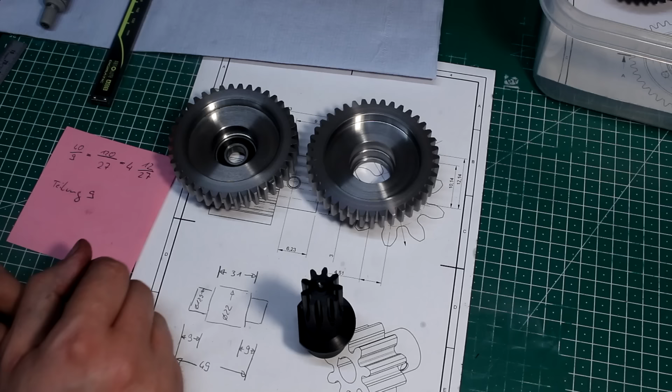Today I work on some gears. I have to modify some gears - these are already modified, and I have to cut two new gears. So we start by modifying these two gears. The gears themselves were commercially bought, readily hobbed gears, but they had to be modified. They had to be bored out, and later we will drill a bolt hole circle. And we need to cut this gear from scratch out of 42CrMo4, a pre-heat treated steel.

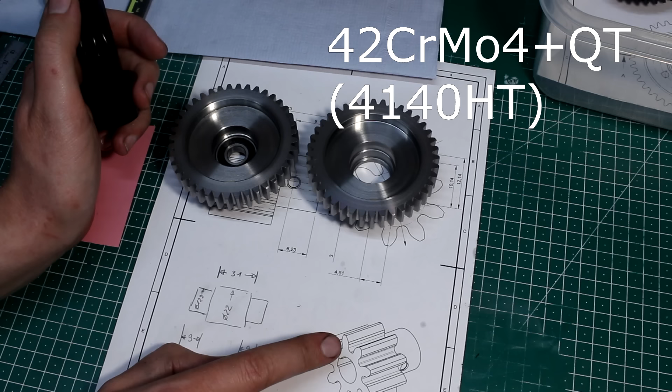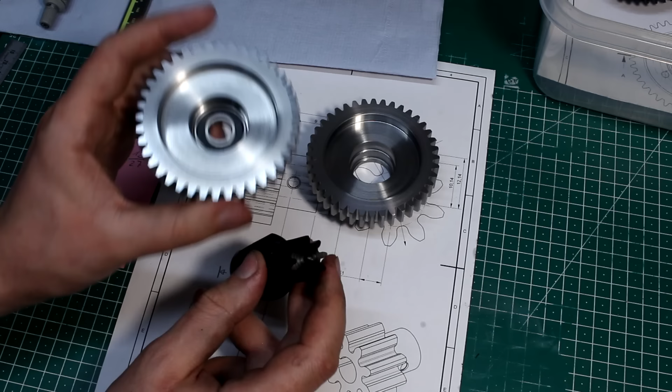4140 HT in the ANSI world. I already did a test part in Delrin because that's the most material I had at hand, and I just wanted to see if there is a minimum number of teeth that a gear can have. 9 is definitely very, very close to that number. The gear cutter I used is a number 1 cutter - I'll talk about that later - and that usually does only a 12 or 13 tooth gear, not 9. But this is for a prototype and has to be good enough.

So it seems to mesh - it meshes nicely. It rolls off the other gear nicely. The profile will not be ideal.

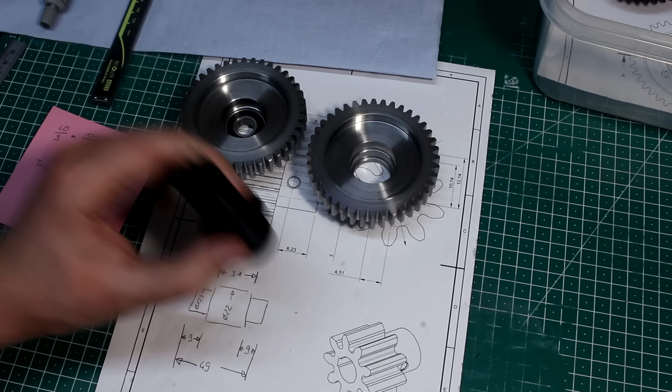So let's start at the beginning. First we look at these gears in an unmachined state - modifying a commercially bought gear. These are soft steel gears, hobbed gears from a supplier. And it's always a good idea with externally sourced gears to check if the pitch circle diameter runs true to the feature that you're about to machine.

In this case, I want to use the center bore as a reference for indicating on the lathe. So I put a 12mm dowel pin in here - that's a very close fit, almost a press fit. Rested it on two V-blocks, and I take a 4mm dowel pin which hits on the flanks of the gear teeth, and I'm using an indicator in my height gauge to check the runout.

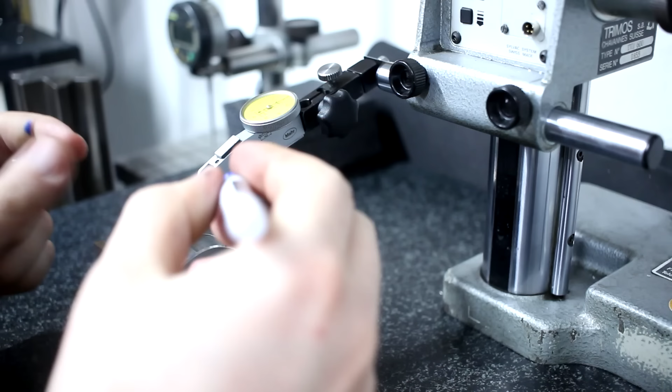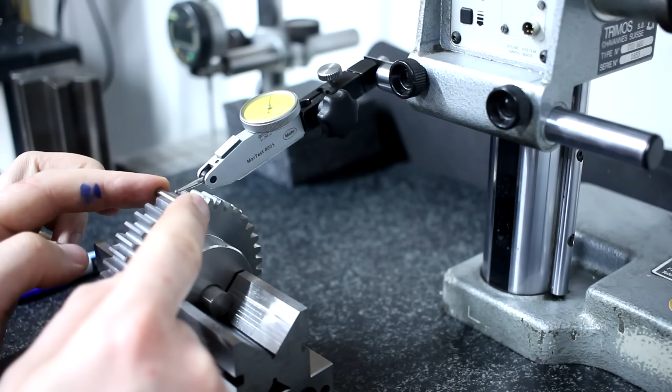I zeroed the indicator out on top dead center of the pin in one position, like this, and I mark the spot as 0. And I spin it about - let's go for 90 degrees. Go 90 degrees, reseat the pin, and do the same thing again. And this is also 0 - so far it looks quite promising.

I had cases where on commercially sourced gears, the pitch circle diameter was not running true to the bore. In those cases, you have to be very careful and indicate or hold the gear on the pitch circle diameter.

Okay, this is minus 10, meaning 10 microns. And last one, this is minus 15. So we have a total indicator reading of 15 microns, 0 to minus 15. That gives us an overall eccentricity of about 7 microns, and that's pretty decent for the application this gear is going on - that's way good enough. Here we can see the pin hitting on the flanks of the gear, on the space between the gear teeth, and the indicator tip riding over the pin.

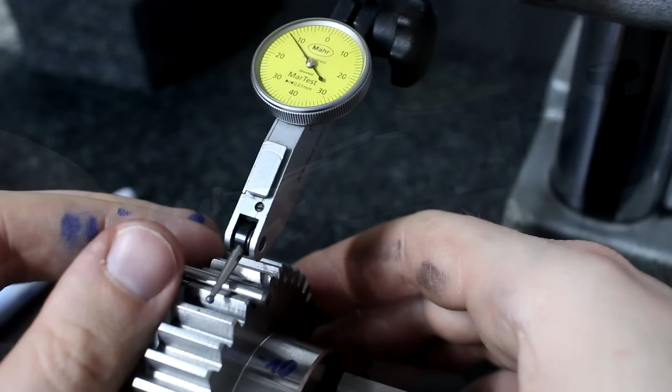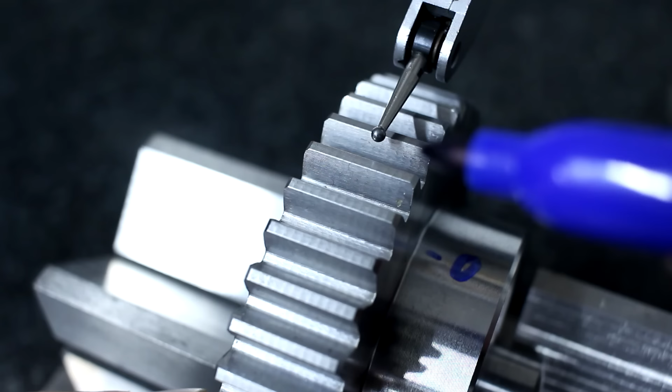When we look closely at this gear, we notice tool marks in here on the teeth, on the sides of the teeth, but also on the top, on the crown of the teeth. That means these gears were cut with a cutter that forms not only the tooth gap in between and the tooth itself, but also the OD of the gear in one pass - like a full profile threading insert that also cuts the diameter of the thread. That means the OD of this gear should run true to the pitch circle.

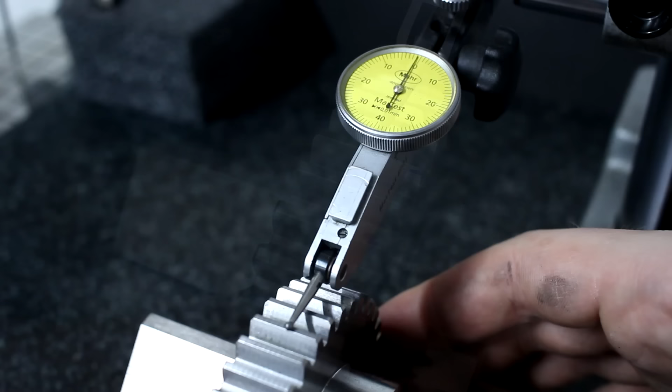So let's check this. Yeah, and now it goes slightly into minus, matching my reading on the pitch circle diameter. So that's a pretty darn good gear - these are very reasonably priced hobbed gears.

No high precision gears. In some cases you will see gears that are only machined, only hobbed or form cut on the gear teeth itself inside here. The crown of the teeth, the top, still has tool marks from turning them. Then usually, depending on how good the part was indicated, the OD does not run true to the pitch circle.

So careful there. We could take this gear now in soft jaws and just hold it on the OD, and that would be perfectly fine and run true to the pitch circle diameter and true to the bore. That's quite nice. But I want to hold this gear down here on this diameter with the 6-jaw. So let's bring the indicator down and check this too.

And that's a case where we have to be really careful. We can hold it on this diameter, but we cannot indicate on here because this does not run true to the bore, the OD of the gears, or the pitch circle. So we're going to hold it on here and indicate either a dowel pin in the bore or just the OD of the gear. In this case, I think I will go for the OD of the gear.

So this is like almost 50 microns, 40 to 50 microns. That's a little bit much. Not going to do it like that.

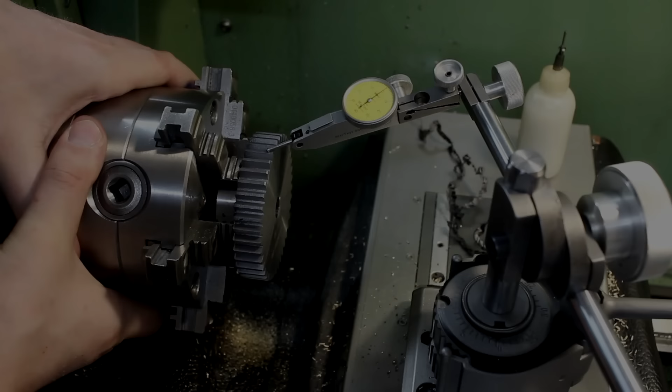I indicated the gear on the OD of the teeth using the Set-Tru of the 6 jaw chuck. And when I jump from teeth to teeth, I'm within the 10 micron range that I had on the surface plate too. So not looking too bad.

Now I will just do a last double check with a pin in here. There we go. Top dead center. 0. Turn it by 90 degrees roughly. Indicate again. 10 micron plus. 90 degrees. Slightly below 0. And again about 10 micron.

So I can be relatively safe now that this gear is running as true as it gets, given the inherent tolerance that's already built into the gear.

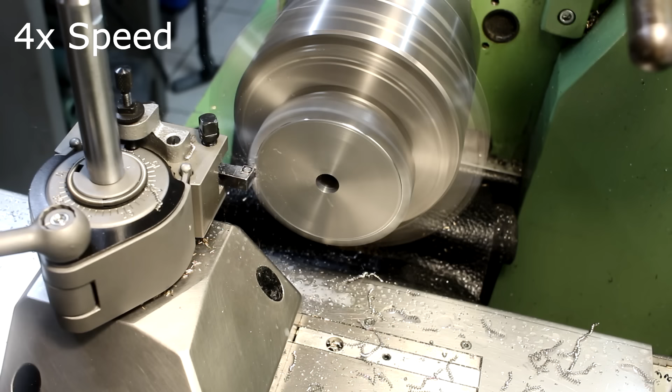Double check my thickness here. About 20 micron below nominal. That's perfectly fine. Now we need to get a boring bar in here.

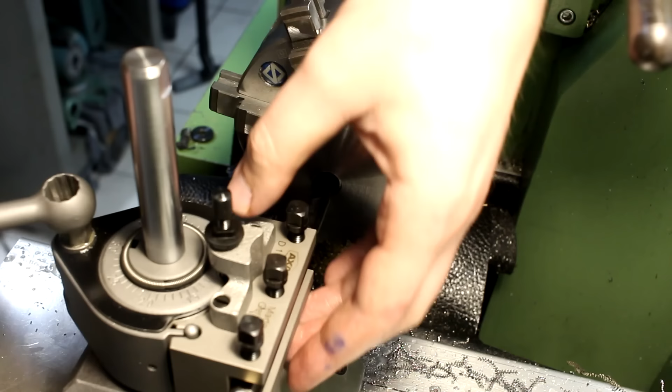So we have a nice 12mm CCMT boring bar here. It's a little bit large for a 12mm starting hole, so I'm pulling the tool a little bit above center so I can take a first roughing pass and widen the bore to get the boring bar in.

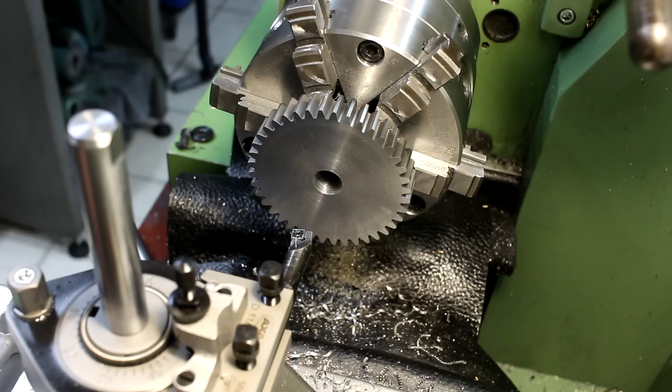Okay, I hand feed the first roughing pass to get an idea of how the tool behaves. Now I can drop it down to its normal center height.

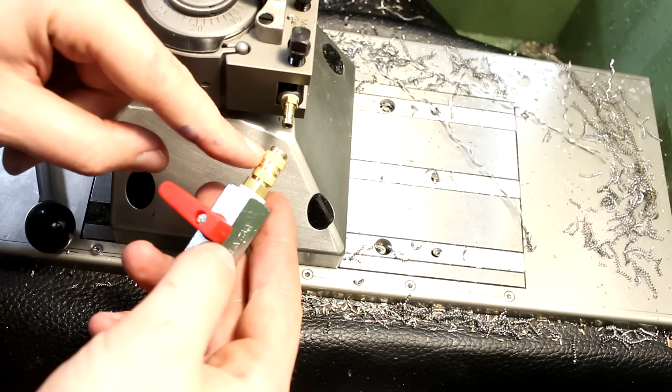I'm running through tool air here. This is a small ball valve with a 7.2mm air coupler, and I threaded my boring bar on the backside also for a 7.2mm air hose fitting or air coupler fitting, and I can just hook this up, turn this on, and I have air through the tool.

The boring bar is already pre-drilled all the way through and has a channel opening here directly blasting at the insert. Normally this is used for coolant, but especially on steel, dry cutting with compressed air to get rid of the chips helps a lot. At first I set this up.

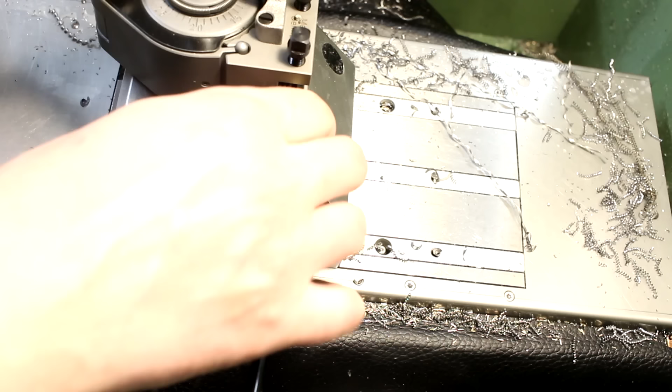I saw this in a friend's shop. He has a wonderful Schaublin 102N VM lathe, and he has the same setup. I thought it's quite nifty, so I copied it for myself.

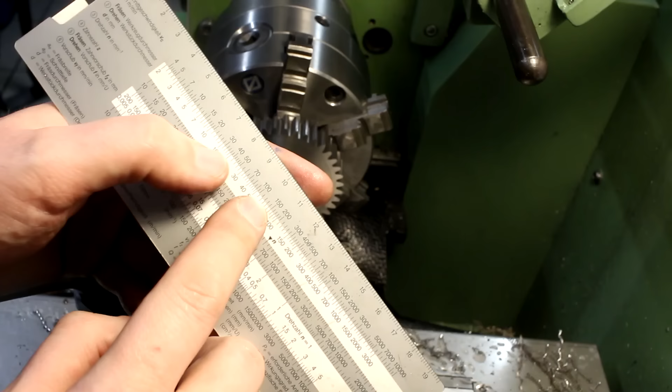That's very helpful. I think we can power feed it now and also increase the speed. Let's see, this is about 15mm. So we want to run about 150 surface meters, and we have a diameter of 15mm. So we have a speed of 3000 RPM.

That's a little bit much. This lathe does only go to 2000, so we go to 1800 because I don't want to spin it that fast with this part here.

Okay, that works exceptionally well. The chips get blasted right through the spindle bore out the other end and hitting my milling machine. It seems like I can take a depth of cut of 1mm with this boring bar in the current speeds and feeds without having the lathe explode.

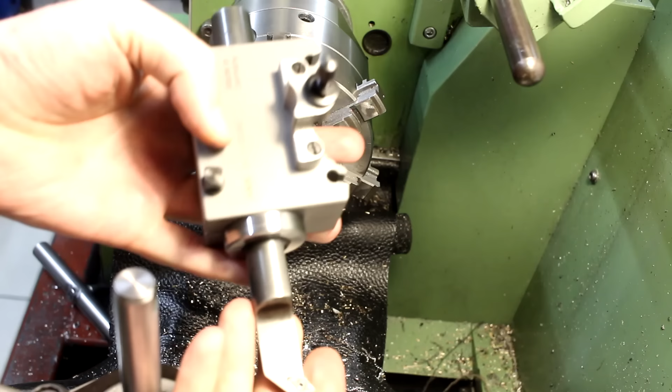So I'm not going to use this flimsy boring bar for final cutting. I'm going to use this 20mm DCMT boring bar in a large heavy-duty boring bar holder that I made recently. The boring bar, not the boring bar holder. That's a commercial one.

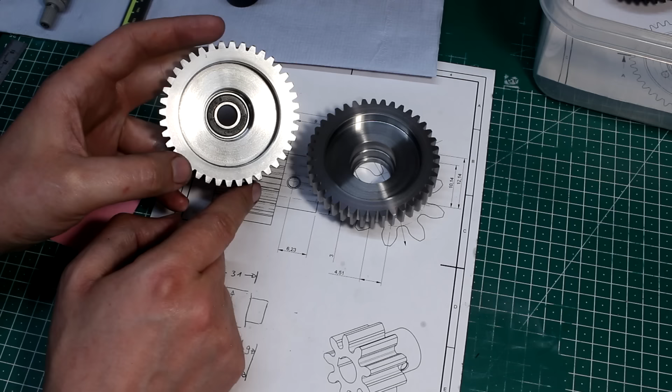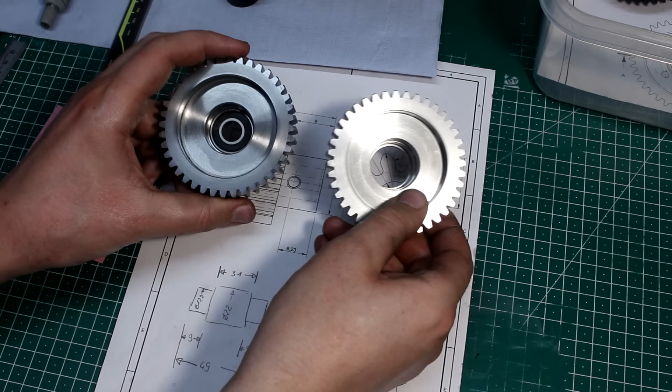So you saw that I went to quite a bit of trouble to make sure that the pitch circle of these gears runs true to the bore that I put into the parts. I'm quite happy about the finish. These are C45 steel, which is a 0.45% low alloy carbon steel, or plain carbon steel. I have these two done, only need some drilling, but we will do that later.

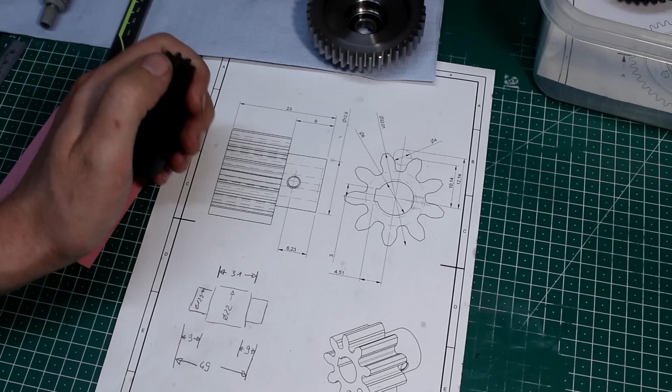Now we have to talk about this thing here. This is going to be the small pinion for these large gears, and I'm not too happy about cutting a 9-teeth gear, but that's what we have to do. This is the 3D model the customer supplied. I pulled the drawing off the 3D model.

I pulled out all the important drawings, and we'll go over to the milling machine because I already prepared the blank on the lathe out of 42CrMo4.

Here's the setup. Walter UTA80 dividing head held in the vise. I have the original Walter small diameter 3-jaw chuck on here. It runs reasonably true. It runs really decent. With some tweaking, runout out here is basically 0.

And this is the blank I prepared. We're going to cut both gears at once, back to back. One gear here and one gear here.

I machined this section here with a part-off blade. And that means that we have to cut only one gear. And then we put this back in the lathe, indicated true, and then part it off in the center. Then we grab it on this short section here and bore them. And at the very end, we have to even put a key slot in them. So these are fairly intricate parts.

This is the Module 2 number 1 gear cutter out of Soviet production, as I learned recently. Not even high-speed steel, this is just tool steel, so we have to be reasonably careful not to burn it up.

And I reground this. I made the last video I did, or one of the last videos I did, showing how to regrind a relief turned gear cutter.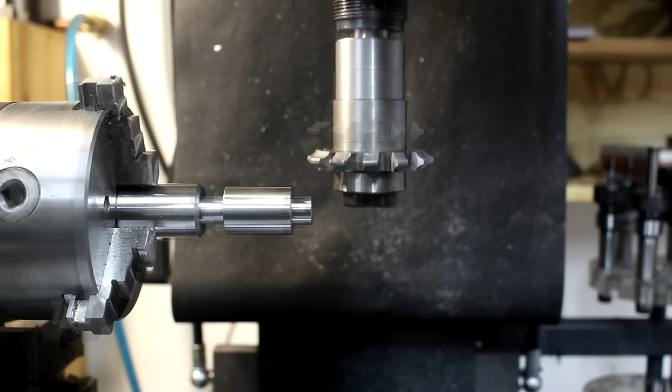How do we get the cutter on center line? Well, that's not too complicated. We drop it onto a known diameter like this small diameter here. We touch off on here very lightly, and we zero out the DRO.

I mic'd this cutter, it's 8mm thick, so we drop down 4mm, half the thickness of the cutter, then we drop down half this diameter. This is 12.9, so we drop down 6.45, and now we're on center line, assuming the profile on the cutter is ground center to its thickness. At some point I have to make an assumption, and when I line up one of the tips of the cutter with the central knob of the face-turned part, it lines up very close. So that's good, that's our depth.

We're going to conventional mill, meaning the cutter goes in this direction and spins as usual. I don't dare to do a climb cut with such a large profile cutter. That's a lot of cut force and will probably end up in a crash, so we're not going to do that.

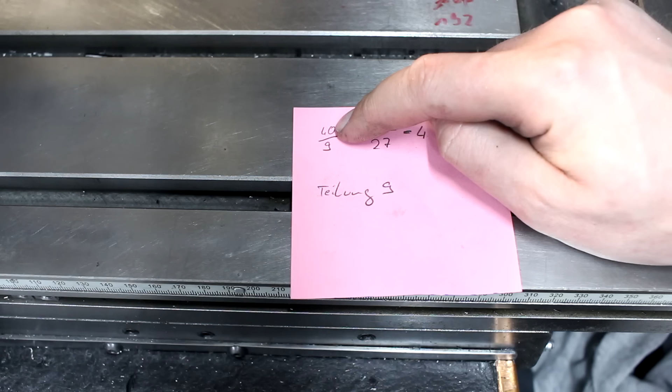We want 9 teeth, and our indexing head is 40:1, so we put 40 divided by 9. That's basically 40 holes on a 9-hole index plate. We don't have a 9-hole index plate, so let's multiply this by 2. Then it's 18.

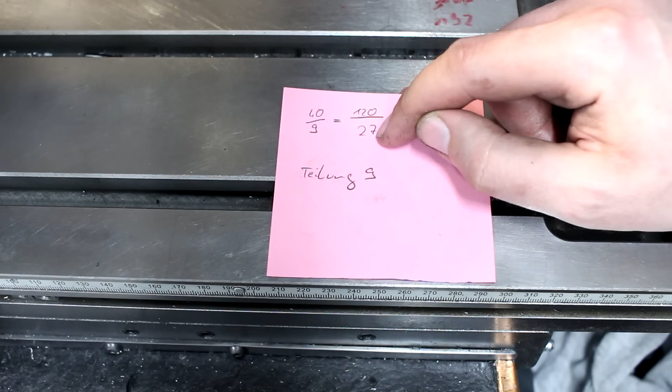So 80 holes on an 18-hole bolt hole plate. I don't have that either. But I have 27. So 9 times 3 is 27, and 40 times 3 is 120. So we have to go 120 holes on a 27-hole index plate.

27 fits into 120 four times and gives us 108. The rest, 120 minus 108, is 12. So we go 4 full rotations on the hand crank and 12 holes on a 27-hole index plate. Easy, huh?

Okay, to get our angular division, we have to do 4 full revolutions: 1, 2, 3, 4. And then 1, 2, 3, 4, 5, 6, 7, 8, 9, 10, 11, 12 down here.

As you can see, I already set the sector arms, so I don't have to do the hole counting all the time. I go to the last hole before I hit the sector arm, that's my position. Then do not forget to move the sector arms up against the index pin again. Just spin it over, and then you can start again. 1, 2, 3, 4, and 12 holes.

Okay, that was quite a lot of milling, especially as this is the second part I made. That's right, I messed one up. Here's the first one, and usually when you mess up an indexing job, it's because you actually messed up the indexing itself - you miscounted, you skipped a turn on the hand crank, or something like that.

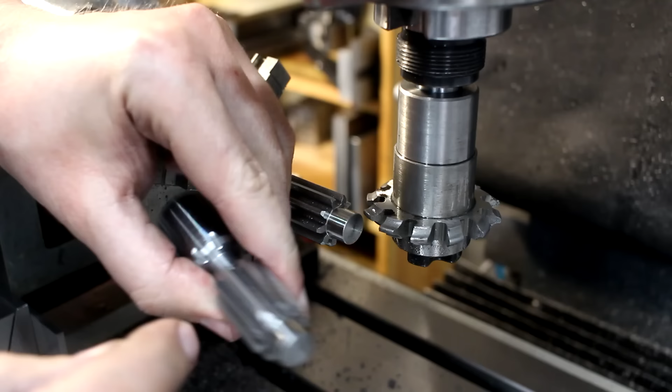But in this case it was something really stupid. The lock of the quill was not tightened properly, and the quill crept up about 1 millimeter during one of the passes. When you measure the thickness of the teeth, there's quite a difference, like 0.2 millimeters from tooth to tooth.

So I noticed it, took the part out, it goes in the shelf of shame. Machined a new one - still had the lathe and all the tooling set up, luckily, so that went quite fast. And then I recut all the teeth, and this time my quill stayed in place.

So this is pre-heat-treated material, comes in at about 1300 newtons per square millimeter cross-section tensile strength, and it's relatively tough. It's a tough material, and it's quite hard with a large form cutter on this lightweight machine to get it done.

But when you watch the footage of milling the teeth, you can see quite a bit of movement in the mill. That's mainly the vertical column twisting in itself.

The indexing head itself is rock solid. It has a large tapered plain bearing in front, and when you lock it, the bearing gets pulled into the taper seat and locks the spindle solid. So the indexing head is not the weak point in this case.

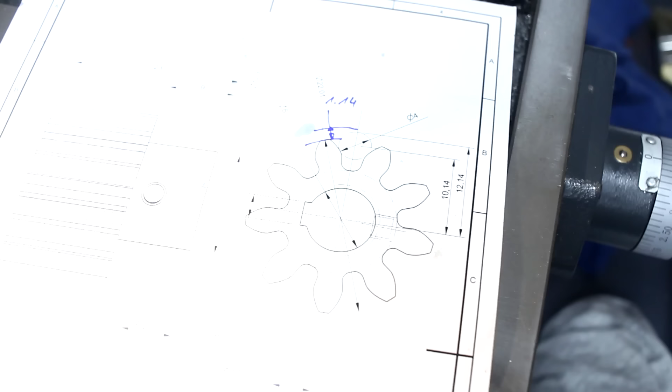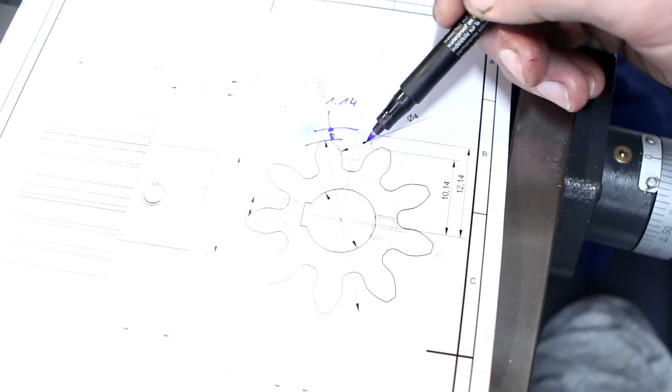When we look at the drawing, I inserted a pin, a circle resembling a 4 millimeter dowel pin or gauge pin, and I dimensioned off the center line to the top of the pin, which is 12.14 millimeters. That's the way this gear was modeled, and I put the pin in. It's easy to measure because this gear has an uneven number of teeth, so I can measure from top dead center pin against the OD of the gear.

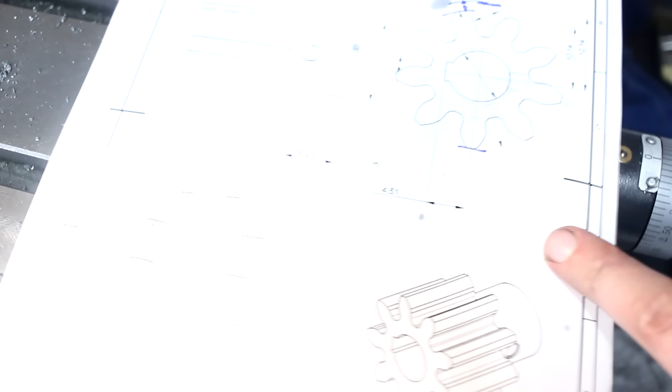The difference between the OD and the top dead center is 1.14, and that's what we measured, so my dimensions hit quite okay. If the gear had an even number of teeth, I couldn't measure against the OD on the other side of the pin. I would need 2 pins and measure from pin to pin.

I cut off the gear from its stock. Now I'm holding it in a 22mm collet, which is the OD of the gear. As I machined the OD of the blank, I indicated it true, and I know it ran true when I cut the gears, so I can use the OD of the gear to hold onto it and know that I'm running true.

So I'm using a part-off tool, a 2mm wide inserted parting tool, to split the gear into two separate pinions now. This starts out as a heavy interrupted cut.

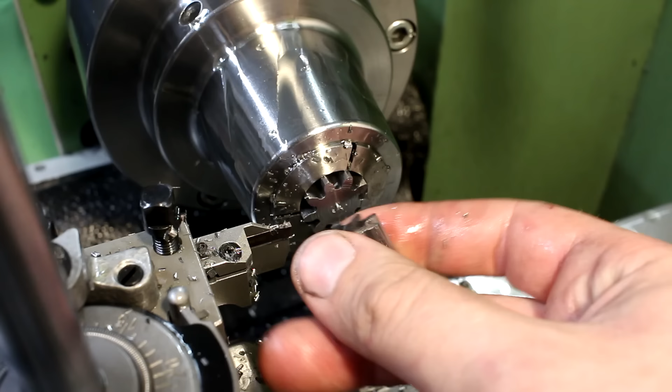Okay, parted it off almost completely. I don't want to have the gear drop free and roll all over the place, so I'll leave usually a small rest of material and just break it off.

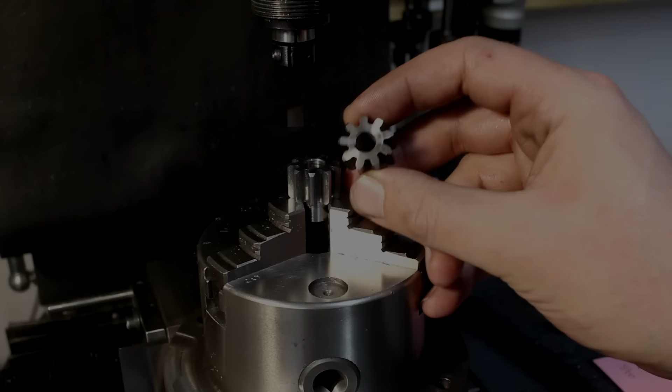Almost last step is to cut a 3mm keyway in here. I have a 3mm slotting tool in the quill of the machine and the spindle. It's aligned in the X direction, so it's cutting correctly. I already did the first one, so I'm already centered over my part.

Now it's just a matter of stepping over, taking a cut, stepping over. You have seen me doing this numerous times. I'm stepping over about 50 micron per pass.

You might notice that I did not lock the spindle against rotation. The simple reason is because it's in this case absolutely not necessary. This tool cuts on center, it's square, and there is no force in the cut that tends to turn the tool. There is no rotational component in this cut. So you align it and then you just leave it alone.

And no, I'm not worried about wearing out the quill bore of the mill. The cutting forces with this process are very light. The tool is at ground, so the axial force comes in very close to the center line of the quill. It's only a very light cut, and running a large fly cutter with a very long extended quill on something like a Bridgeport is probably way worse for the machine than this.

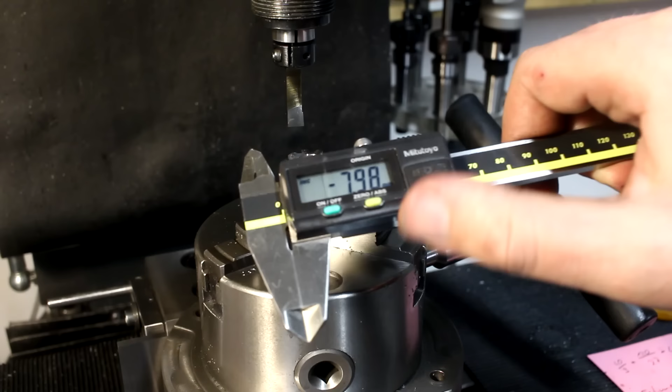So I zeroed out the digital caliper on the bore diameter, so it's 0 at its diameter, and I know the height of the key slot from my CAD model that I got. So I can measure it like this, and it should be 0.6 millimeters, and we got 0.63, so we're good.

And there we go, 2 gears with 3mm very shallow key slots.

Don't comment on the design, it's customer design. I know the background behind this design, and there are very strict size, room, and distance restrictions between the shaft, and we couldn't figure out a better way than this. This has to do, this is a prototype, so we're going with it. A 9-tooth module 2 gear is not the ideal solution, but it's all we can do right now, so we're trying this.

And you get some gear cutting and machining footage, so it's a win-win-win-win, I guess. Okay, here is the slotting tool.

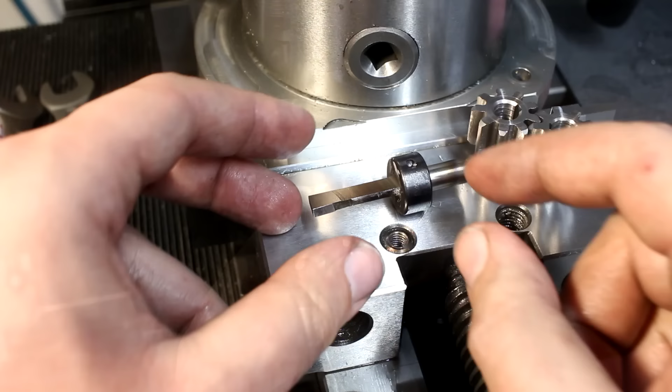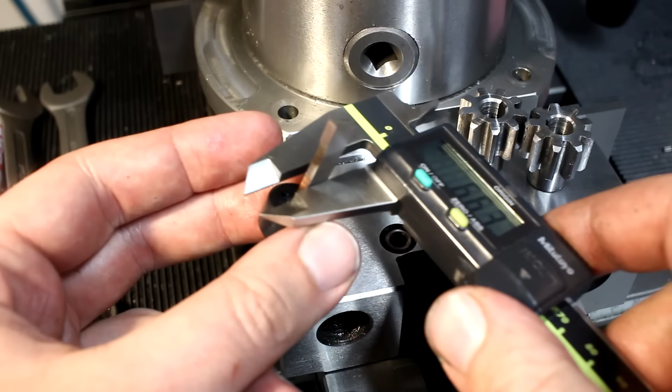I ground it to 3mm width in front here. Then I relieved all this material here just in the thickness. So in front here it's 3mm. That's the cutting end, and the relief shank is only 2.4. This surface here is a little bit tapered to the back. Here it's 3mm and back here it's less.

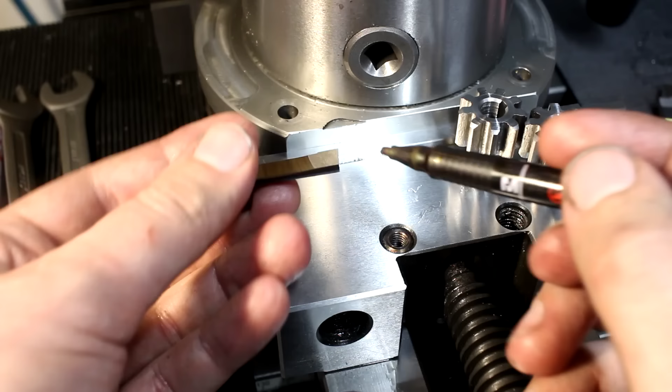I put about half a degree of back taper on here, and back here it's only 2.8, and in front, as I mentioned, it's 3mm. A little bit of positive rake here, so it's cutting a little bit softer.

Don't make this angle too big, otherwise the tool will tend to dig into the work. This is about 3 or 4 degrees. And here a little bit of clearance angle, so it doesn't rub when it goes down like this. 1, 2, 3 degrees, that's fine.

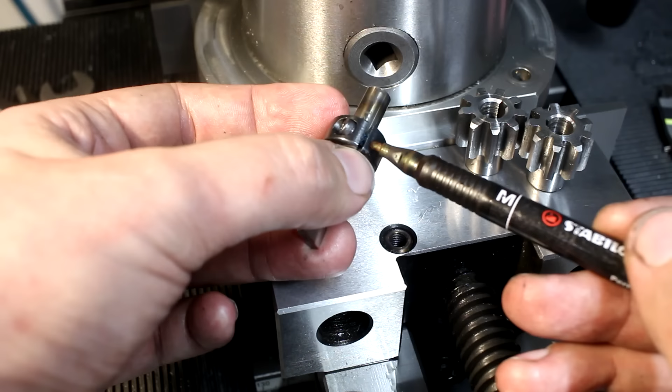As usual, when I do slotting, I put a shaft collar on here, so the tool doesn't get pushed up into the spindle of the mill, or into the collet of the mill.

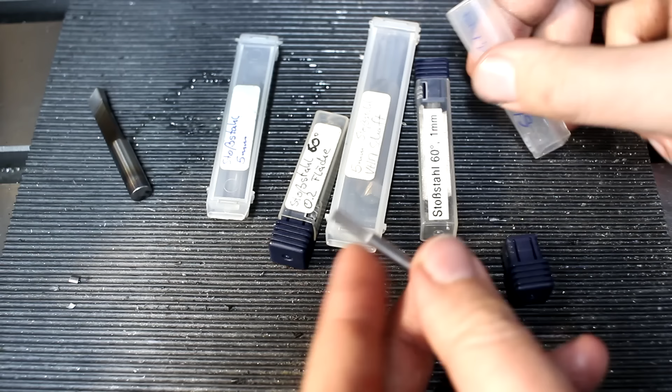So, while we're here, we can look at some of my slotting tools that I ground recently. This is a very narrow slotting tool, a 1.7mm slot, and I use this just to cut a clamping slot.

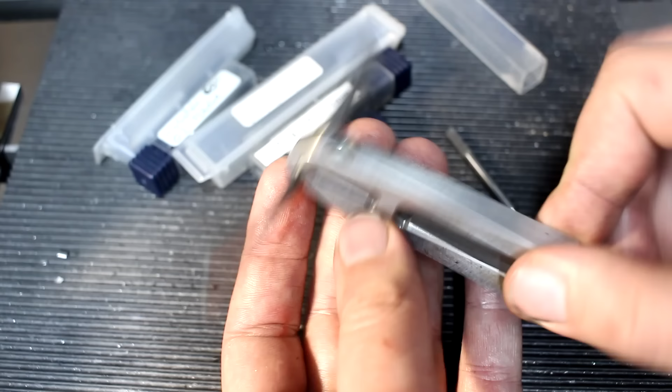So this is my vise stop, and I use this slotting tool to cut this blind slot, which goes from here to here and does not exit, so it's not a band sawable or a circular sawable slit. A little more elegant than an open-ended slot for a clamping situation.

And there's just a pinch screw that pulls it together and holds my vise stop together. Looks kind of clean.

60-degree slotting tool with a 1mm land. This one was for a spline drive, did a video on that. 60-degree with a 0.2mm land on here. This was used to cut the spline drive sockets quite some time ago.

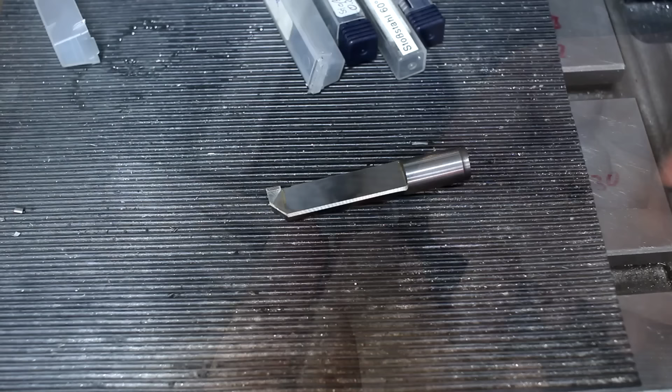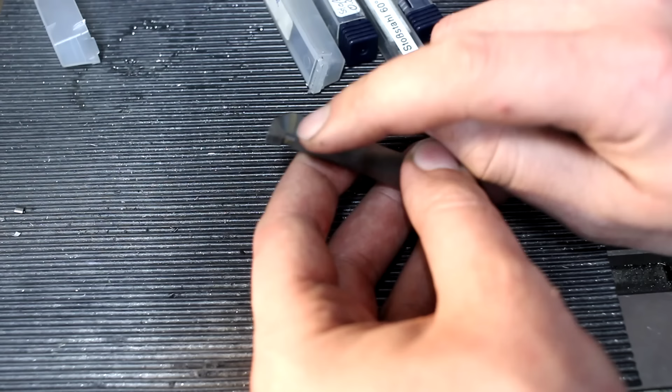Large 5mm keyway tool. So this last slotting tool is probably the coolest. This is a carbide shank, solid carbide, all the way up to here, and you can see the braze joint, the silver solder joint, and I have a piece of high-speed steel cobalt 10 silver soldered onto the end of the shank and ground into shape. It has the same small cutting angle, relief angles in all directions, but it has a solid carbide shank which is 3 times stiffer than a steel shank.

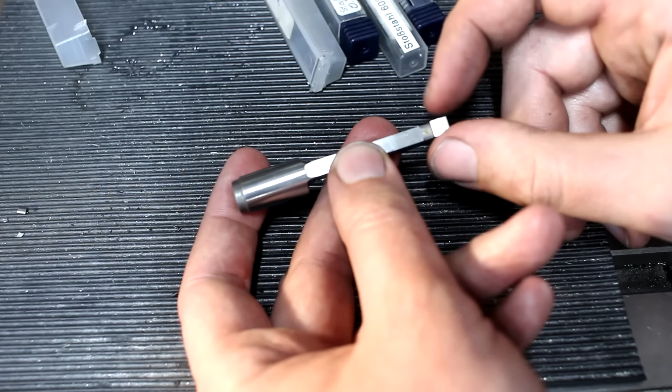And I needed this because I was slotting this whole length in steel, 5mm wide. That 5mm width is probably almost the limit of what I'm comfortable doing on this mill in one pass. Otherwise I would use a 3mm slotting tool first, then take the tool out and put in, for example, an 8mm tool. So it reduces the cutting forces.

What works pretty bad is stepping over with a slotting tool. That's bad. These tools are very stiff in this direction because they have a very large cross section here, but in this direction, side to side, they're very weak because of a very thin cross section. So stepping over to the side usually ends with a very bad keyway, bell mouths on the start, and just not a good job.

Better to use increasingly larger slotting tools. So that's slotting tools, and I keep them around when I'm finished with them, for the next job.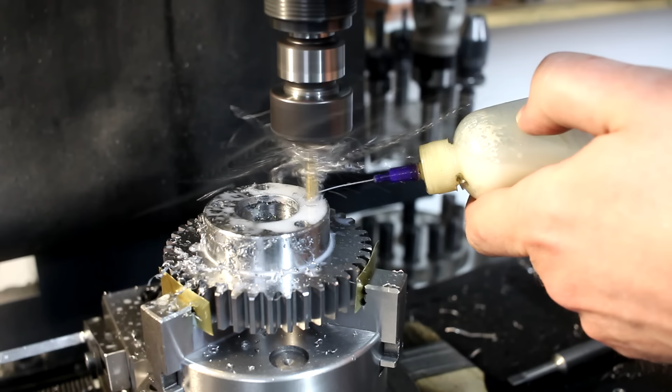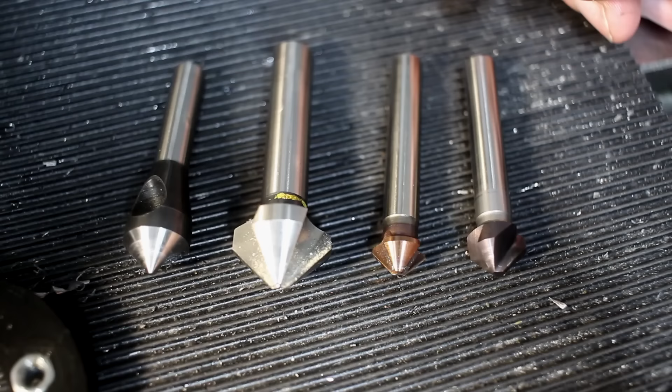While I deburred the holes in the gear, I thought I could do a little bit of content on countersinks. I have 4 types of countersinks here. These are the common ones that I tend to use.

These are the single flute with the cross hole. They are really only good for light deburring. They are not for doing a proper countersink in my mind. They work exceptionally well in a cordless drill. I don't like them on a machine tool very much. Not the cool one, I just don't like them too much.

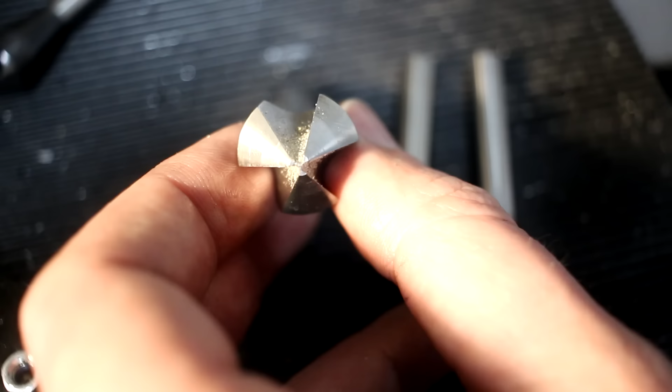Standard 3 flute countersink, that's what a lot of people are familiar with. Evenly spaced 3 flutes, high-speed steel, work very well. You run them relatively slow and feed them relatively hard, and they will leave a very nice countersink, usually.

They can be troublesome. Sometimes you have just a setup that is not cooperative. You get chatter or an out-of-round countersink, stuff like that. Can happen. Takes a little bit of practice and feeling for these things.

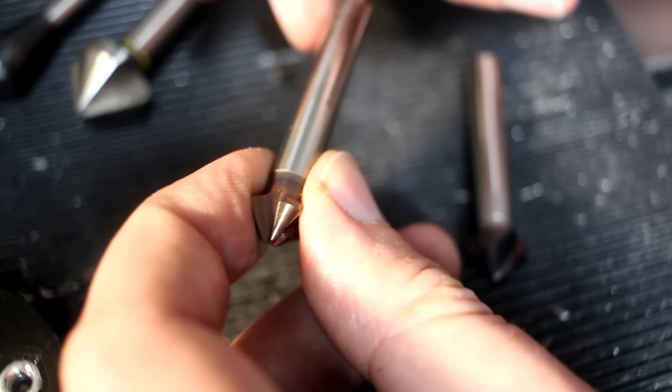Next step up is basically the same, but with unevenly spaced flutes. So these have a tendency of almost never chattering. Very expensive though, coated. I bought this years ago and it's still perfectly sharp. When you look at the coating under a microscope, it's still fine.

Worth its money. And then the coolest one is probably this one here. So this is a normal, this is a 3-fluter too, but it has spiral flutes.

Gühring makes these, Gühring Spiro, they are called. They are not cheap, I will say that. But they are not that expensive that you might think. So these are really cool.

They cut very free. The flutes are unevenly spaced. When you look at the size of the flutes, they are not the same all the way around. And due to the spiral geometry, they cut so soft, very little cutting pressure needed.

Even in something like a 303 stainless, or even a 316 stainless, if you run it at a slow speed, it will not chatter. Give it a little bit of pressure and it will just cut a nice countersink. These are brilliant. So that's my 5 cents on countersinks.

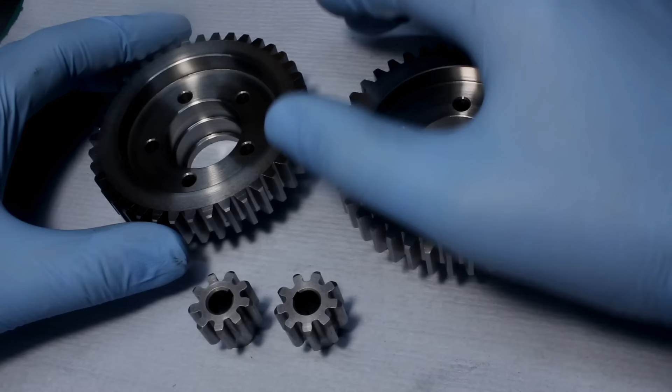It's basically like this: okay-ish, okay, very okay, super okay, something like that. These are really cool. Okay, got the parts finished.

Large gears have been machined and drilled, bored out and drilled. And the small ones machined completely from scratch.

As per request of the customer, we added an M3 set screw thread for a set screw, opposing side of the keyway. We will see how these hold up.

So at least they run quite okay-ish on each other. The geometry on these is probably completely off now, as we went with a way smaller tooth count than the cutter is actually designed for, but for a test part it probably will work out fine.